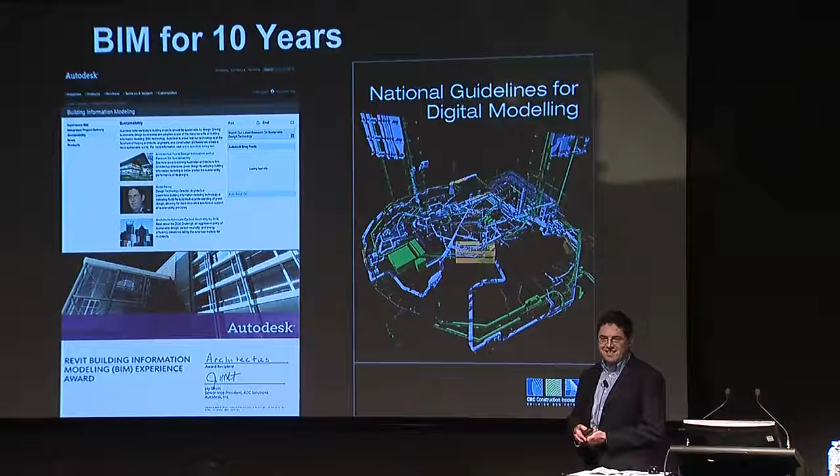So I'd just like to first introduce Architectus. We have 4 design studios in Australia and New Zealand and a representative office in Shanghai. We represent about 200 plus design professionals across those offices. And we've been using BIM for 10 years. I might say that, thanks for the insight, Andrew, but I think that if I had lost $200,000 on our implementation project in BIM, I wouldn't be here speaking to you today.

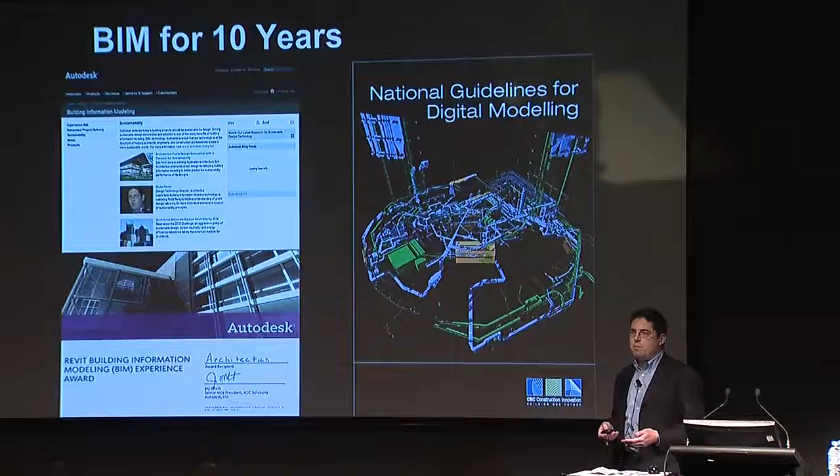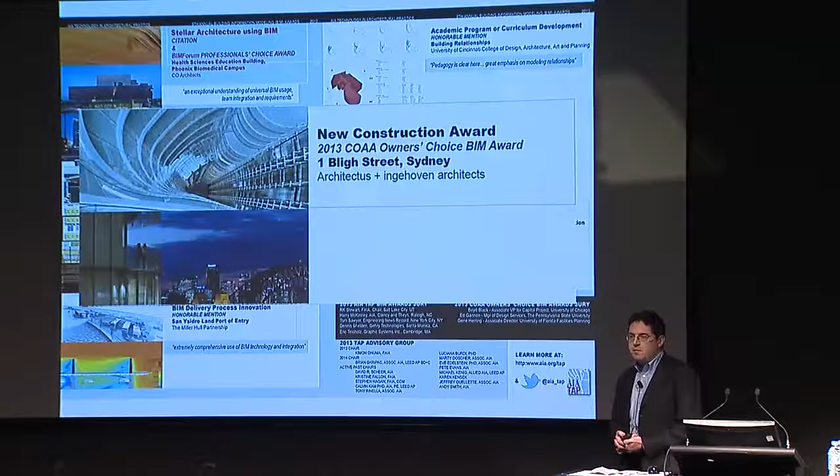Anyway, we've had considerable success with BIM, and that's been in an environment where, as time has gone by, we've been more and more able to work with other people and really develop a collaborative environment for BIM. Recently, we were very pleased to receive the American Institute of Architects Technology in Architectural Practice Award in the Owner's Choice BIM Award category for One Bligh. So I think the Opera House has previously won an American Institute of Architects TAP Award from Australia, so it's great for BIM in this country to get that kind of a profile.

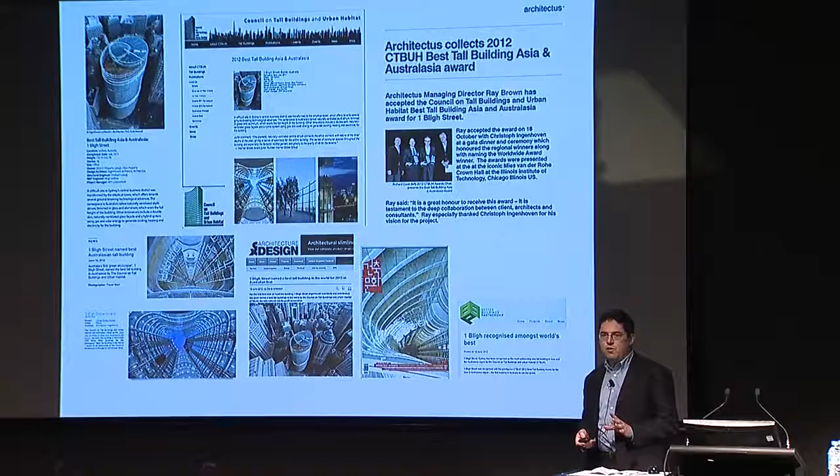And the building itself has been awarded in many international forums and in Australia. And I think that a lot of that is to do with some of the design quality that was able to be built into that design through very active engagement with our models and a lot of analysis and simulation. Now, for a large part of our BIM, we have actually been practicing lonely BIM, and I've commented before, its only virtue really is that it allows you to practice and get your own house in order and know really all of the detailed aspects of what you need to be doing to work with BIM.

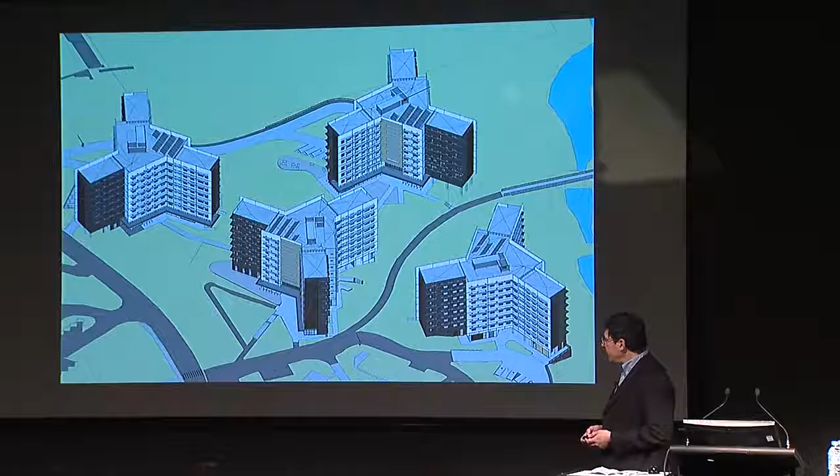What we really want to do is be working in the collaborative BIM environment. And this is an example. I'm working on this as an architect. It's my own project, 750 student beds with a major engineering company that has its own reputation for BIM, as do a lot of the individuals that work for that company. It's no one that's here today, but in fact, even though we're all working in BIM, we're working in the same Revit platform, we have not actually seen their model for more than a year.

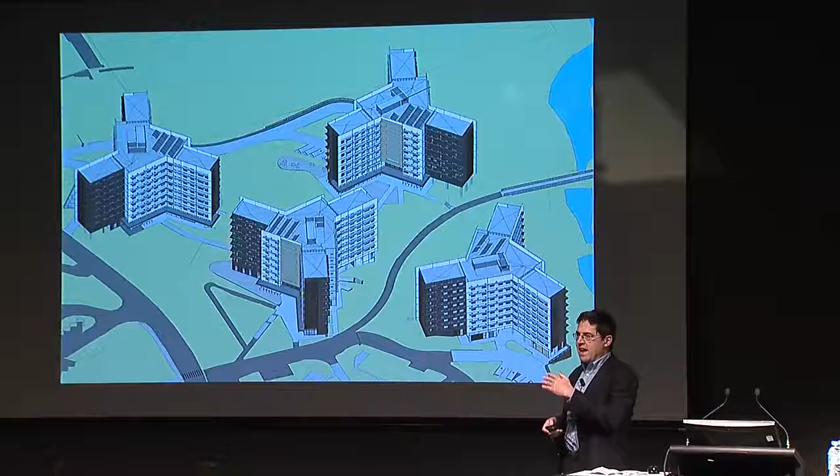And to me, it's a great shame, it's a great lost opportunity, but there is no BIM environment created around this practice. It's maybe an earlier stage even to the ones talked about yesterday, BIM enabled, BIM potential, but not taken up at all. So I'll just take a step back and think, well, why are we collaborating? What is it that owners really want from BIM? And clearly time and cost savings.

And I think, as Andrew alluded to, as BIM becomes more mainstream, as it extends further and further into construction, as it starts to optimise designs, and as people start to have confidence in that, then that will also start to bring about a reduction in subcontractor pricing, which will flow into head contractor prices, which will position certain parties at a competitive advantage, and that will be the tipping point where BIM becomes mainstream. There's a lot of hard heads in the world, and this money angle, especially if it's US dollars like that, that's what really persuades them.

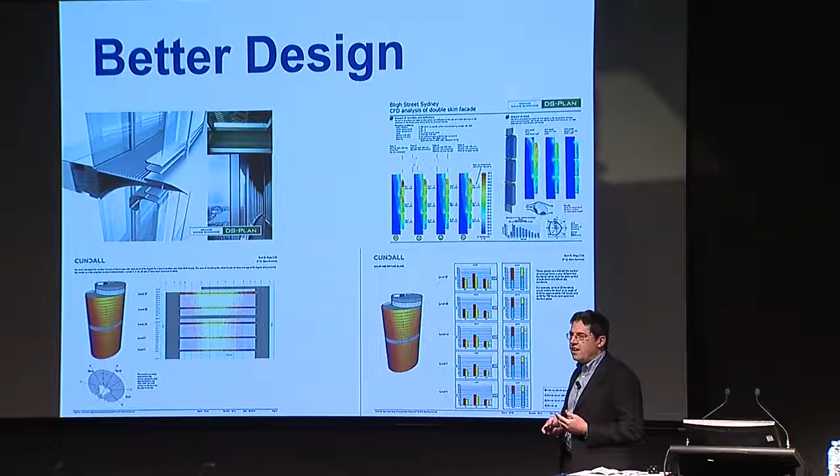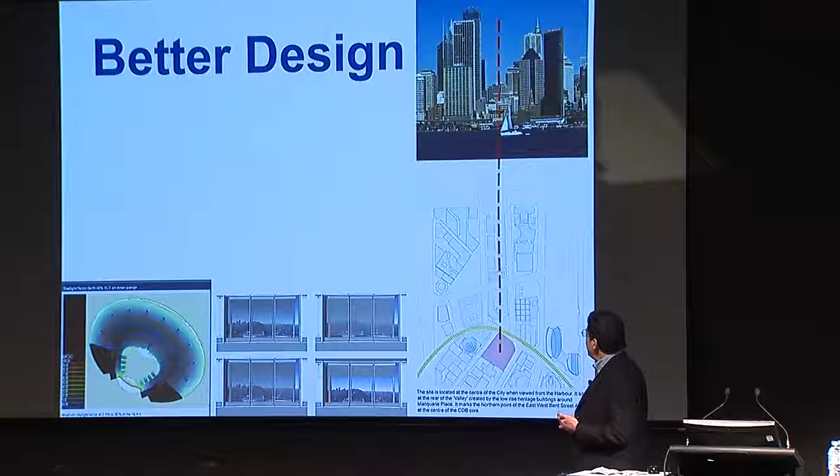But also better design, sorry, Chris, for the One Bligh, but this design was very much proved and tested using BIM processes, collaborative BIM processes. We had Cundall doing glare analysis and heat loads. We have a lot of computational fluid dynamics. We have a detailed examination of the double skin facade. We did view occlusion studies. We did lift studies. We did all sorts of things.

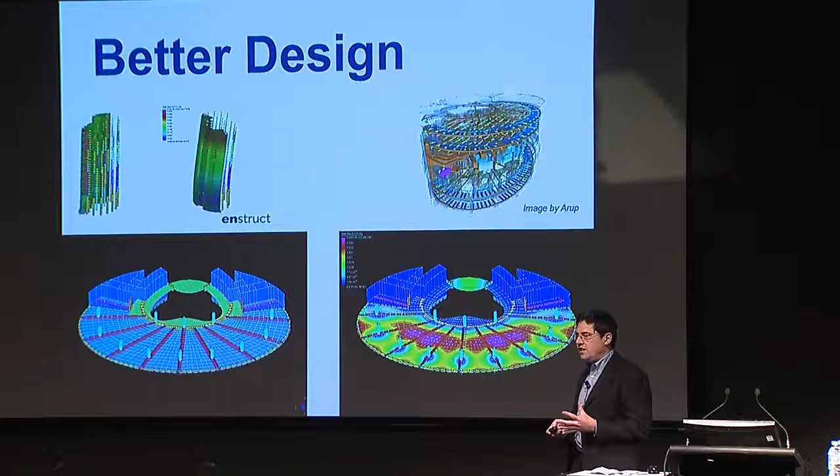Enstruct did finite element and slab deflection studies. Arup did very detailed consideration of the models at a slightly later stage, but that is your construction stage model. All of these things are unavailable for analysis and simulation in the 2D non-BIM world. The other thing owners want is lower risks. They want to not discover that the project is way over budget, too late to change it. They want to know that the design can actually be built.

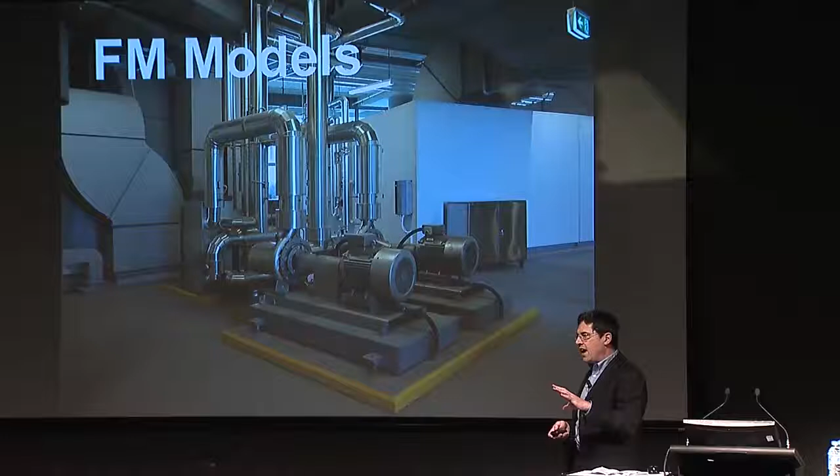And finally, I think FM models and the BIM MEPAUS initiative is very much based around the idea of transporting data from the early design stage of the project through so it's still there in the facilities model.

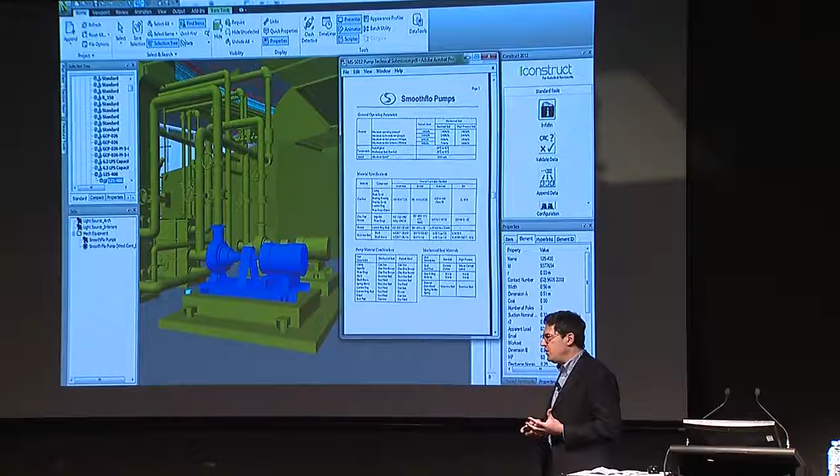We've been able to take the One Bligh handover model and prepare that as a platform for a facilities model for Dexus. And I think in terms of persuading an owner client like Dexus to mandate BIM on a project, it's essential that they think they're getting something for this, and at this stage they're not actually getting cost reductions. So for them to have a facilities model that they may at any time in the future, when that becomes more mainstream, be able to take up and use, is a very important selling point for the entire concept of BIM. So BIM is really an enabler.

In the 2D world, we don't have the quality of data and the timeliness of data to enable us to collaborate in any meaningful kind of a way. So BIM becomes a single point of truth. If we have proper model progression and we understand where the model is meant to be at any particular time, and we have a proper definition of level of development so that we know whether objects are specified or at that stage unspecified but really just placeholders, then we can interrogate other people's models to find out where their design is up to at any given stage.

Now that's a level of data mining that's not possible at all in the 2D world. All we do is get finalised 2D documentation that we don't really understand, isn't necessarily coordinated, and doesn't have any data or intelligence attached to the elements displayed, so we can't really find out what they are except by asking, and that as an object-by-object activity is far too onerous a task for anybody to do.

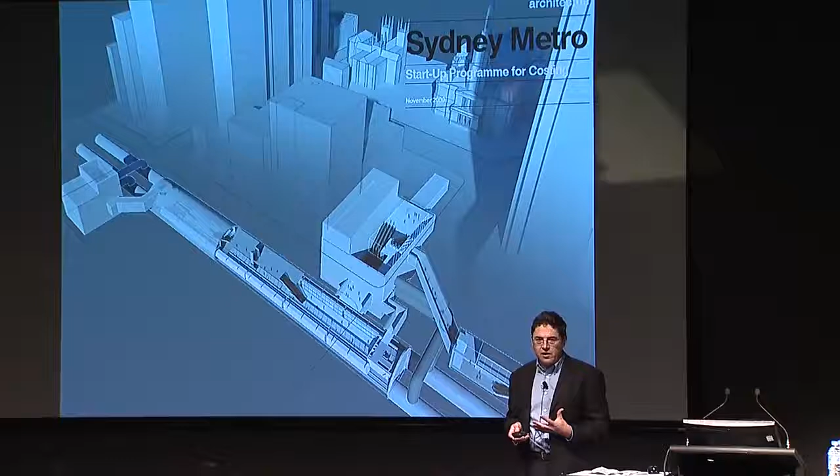So the problems with 2D were illustrated by this. We modelled the reference design for Town Hall Station in the Sydney Metro on behalf of Laing O'Rourke so that they could use that as a basis to estimate the quantities. And some things we found in that reference design was that, first of all, it wasn't resolved. Most of the fire stairs just never hit the ground, so too bad if there was a fire in there. And also that the 2D plans and sections didn't represent the geometry. There was no way of actually understanding the material quantities inside this with its complex forms without having modelled it. So it was a very informative exercise to have done that.

So I propose that BIM really needs to be put at the centre of what we're doing as the main channel for communication between the parties, and by all means have a face-to-face meeting around that, but forget about 2D document issues and waiting for another batch of drawings that'll take you a week to flip through before you even really understand them. Make this the centre.

So at One Bligh, it was a very simple topology to the way that was put together. We basically had 3 models coming together, and when they all link together, you can just think of that as the BIM. And from that, that data gets exported, sometimes one way, sometimes two way, to various other kinds of analysis packages, various things like Ecotect or Strand7 or whatever for particular analysis and simulation functionalities. So this gives us a real project understanding. We kind of understand where the other consultants are up to with their thinking.

And it allows innovation because I think often innovation is actually driven by having another person around the table to the usual bunch of people, someone who can just throw in that off-the-wall idea that actually is quite a good idea. And I think this is one of the key advantages if we can start to move to a situation where we have early subcontractor involvement in our projects, early contractor involvement. If we can get those ideas in early, that is going to change the way that we actually design things. And making BIM the centre, getting everybody together, just spinning the model and having a look and seeing where it's developed to at a certain time.

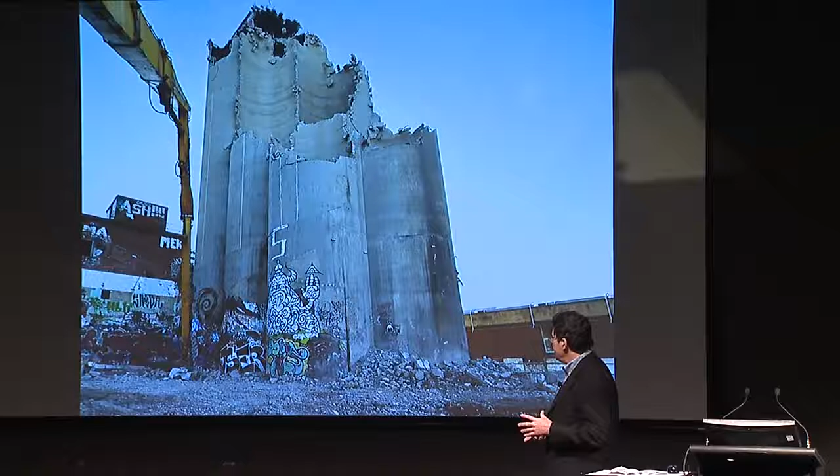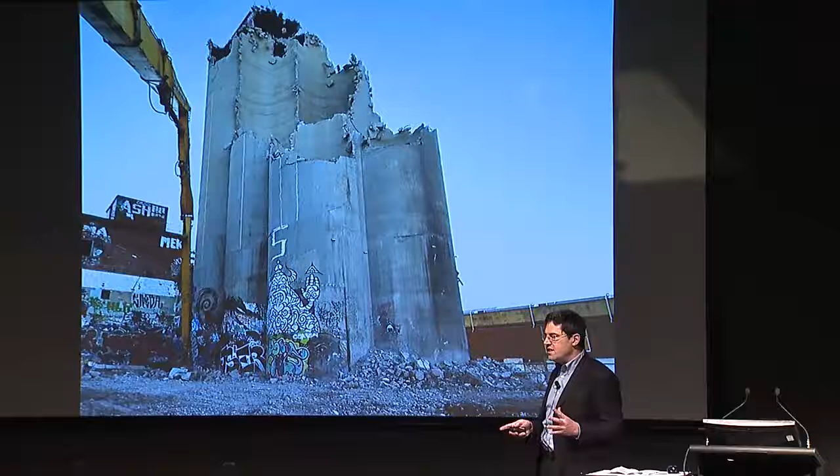We really need to be breaking down these silos and find a way whereby a project team that has members from across a number of different organisations can actually get together in a truly collaborative way. And I believe that that needs a framework. I don't think that just by the client saying, we'd like you guys to all use BIM, and to me that implies you're all going to collaborate, I don't think that that does anything much at all.

I think what we really need is to have a very detailed strategy around how we're going to collaborate on the project. And a few people have made the point. This isn't about technology so much. The technology is complex, there's no doubt about it. I am very hands-on, Andrew, and if somebody comes to me with a Revit problem, sometimes the answer is not at all apparent. If you're hands-on with Revit, you'll know what I'm talking about. There need to be those technology guys that have the answers, but that's only part of the picture.

We really need to be very inclusive in the way that we involve all of the designers, all of the parts of a project team in using the BIM at the centre in order to collaborate, and that requires strategy. It requires cooperation and it requires trust, and I'll mention a bit later, but we don't actually have a hard contractual framework in which this is happening at the moment.

What we have at the moment is people going ahead and saying, this BIM, it's a great idea and we're going to do it because we're enthusiastic about doing it. We're going to throw a bit more effort into our projects because we think that's very beneficial to the project. We're going to find people that we like working with and we're going to try and work with them again and again on different projects. And that's what's happening at the moment. It's based on building trust and building cooperation.

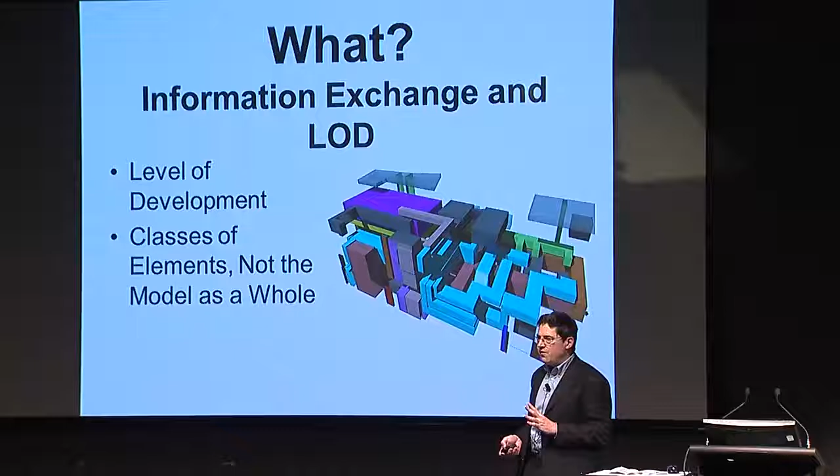And we certainly don't take Revit models and upgrade our families throughout in 5 distinct steps to represent 5 distinct stages of level of development, like it might be assumed you do from looking at a BIM execution plan in isolation. So that is something that needs to work through in the way that you would develop a framework. I mean, perhaps it's a case that objects in models need to be tagged with some basics as to whether they are still generic or whether they've been selected or not. Maybe that's just a switch on the object rather than anything else, and we use the same family all the way through, or whatever it might be.

Because if some of the information in the model is unreliable, then it all is. Like, you know, if somebody else is looking at your model, and they're trying to speed up the workflow, then if they can't rely on this bit, they're not going to rely on this bit over here. One of them might in fact be reliable, right? So we need to actually have a defined concept of how that's going to work.

There's also issues of asymmetry of information. I won't go through the whole thing, but you know, sometimes I need a bit of information that somebody else wasn't thinking of providing till well further down the track, right? So we need to actually flag those issues and find a resolution for it.

I saw a presentation from someone from HOK, whose name escapes me, but they were saying they had a project office. They were all co-located and they were working on a project together. It was an extremely collaborative environment, except that the HOK guys found that they were spending all their time answering questions about their own design and their own model coming from all the other parties rather than the other parties looking at the models themselves. And in the end, they said, you're only allowed to service other people's information requirements for a 1-hour period every morning and then get back to work, basically. So we need to make sure that actually everybody has the skills to go and interrogate, and that we have the integrity in the models so that we have reliable data that can be used.

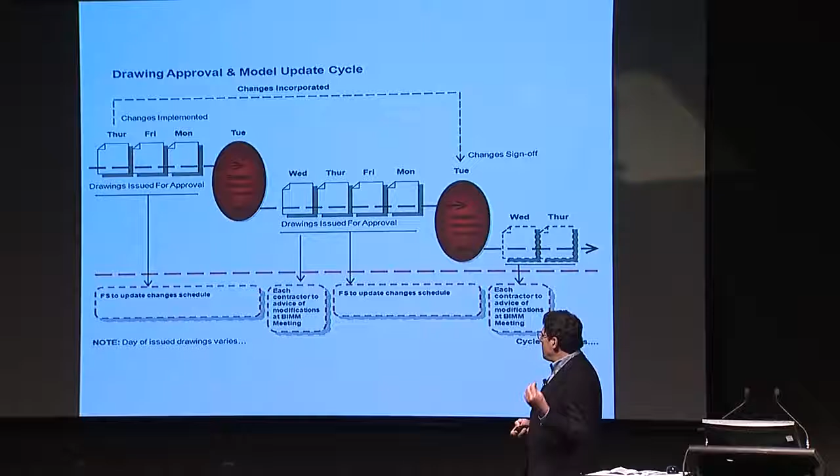So model progression, we need to know where we are with the design of our models, and what is selected, what isn't selected. I think part of that is having a publication cycle, we called it. Alex had a similar idea yesterday, so good to see people are generating the same kinds of ideas. But you can't have continuously changing models. Nobody can get a grip on that. We're always in a state of transforming our models and it's half done.

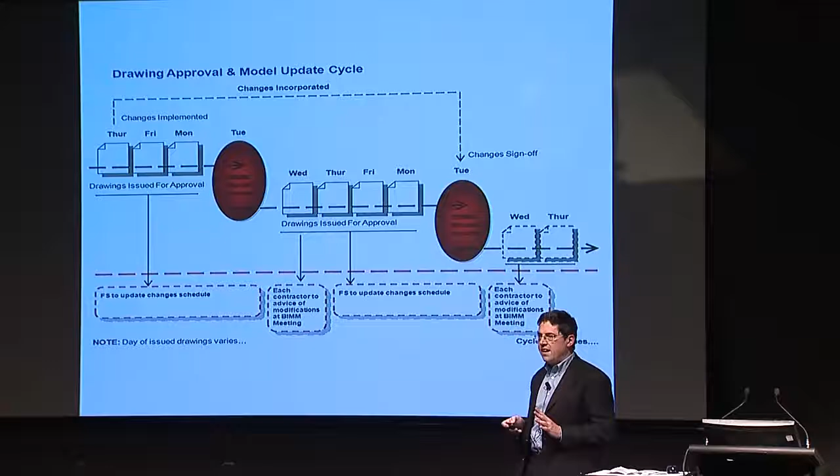We need to have some hold points where we just freeze that model and get it out, and that's what people look at. And that can go with clash reports or revision clouds or whatever is necessary to tell people which bits you can look at and rely on and which bits to ignore for now because they're still halfway through a change. But the idea of a model server with everybody checking stuff in and out and making changes all the time, I think is really like wrestling jelly in the current environment. It just takes time to get any change done to a model.

So we need to understand other parties' project workflows. That's what that LOD example was. We need to understand that at schematic design, or when we're ready to go into a development application, the architect is going to have columns in his drawing set that goes to council. But at that stage, the structural engineer could perfectly well just be working with the sketches and calculations and a fairly conceptual design of what they're doing. They may not have gone into hardline at that point. In fact, I think it's somewhat unlikely that they have. So we need to understand that that's the way the workflow works.

If it doesn't suit the architect for it to happen that way, well, that needs to be workshopped and a solution found to it. If we're going to rely on their objects in our models to complete the picture of any 2D output, well then we are letting somebody else have authority and responsibility over something that's absolutely essential for us.

So perhaps a better way to approach that is to say we're going to do a handover at a certain stage, or we're going to have managed but parallel objects, and we're going to have a system in place where we don't double count those objects. But there are a lot of those kind of issues in bringing multiple models together.

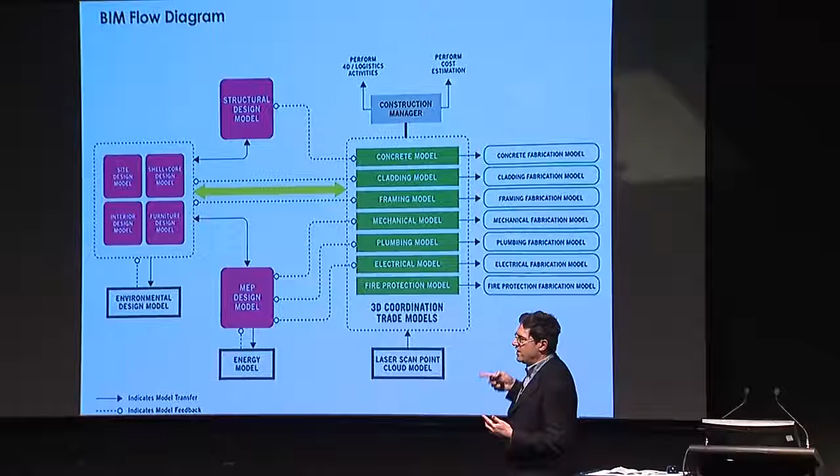Do the project leaders in the various offices actually understand this diagram, or anyone like it? Do they know what this is signing them up for, these links, and is this just representing a one-off thing, or how often is it, and who's doing it, and all of those kind of things.

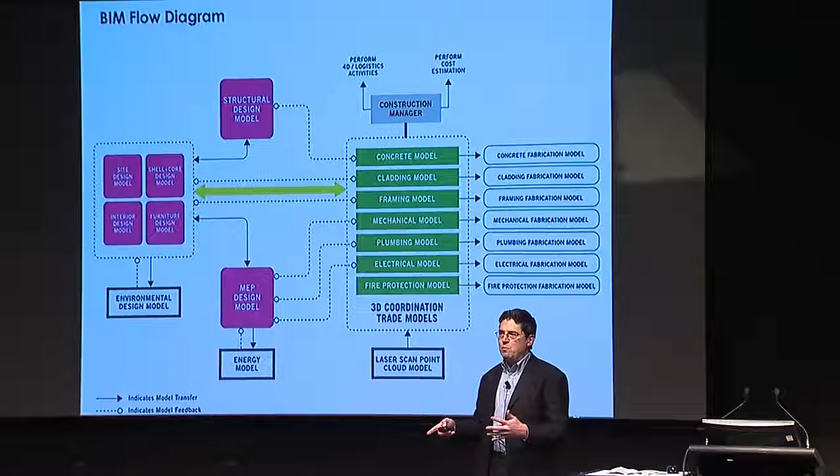I mean, there's a whole aspect to BIM that is very technical and should maybe be left to some technicians who know the answer to this kind of stuff and can just report to the project leader and say, look, it's not a problem, you can do it, you just do it this way.

File transfer mechanisms, we've seen it from Aconex today, we've seen Cloud 360, there's lots of ways of doing this at the moment. I don't think there's much point to it unless you have that publication cycle in place so that you know really rigorously when you're going to be delivering information, and also importantly who might be falling behind in their production of design information, because if they're falling behind in getting their stuff out, well, you're basically not collaborating with them. They haven't thought out their design sufficiently for you to make any intelligent kind of comments on it.

And co-location represents a great opportunity on the project sizes that warrant it, but impossible to do on anything small. Our organisation silo will override any benefit from co-location. Project scope, setting fees and expectations.

We used to do a certain amount of work, then we could do it with BIM authoring, and that was actually less work once you're good at it. And then we start to do all of these extra things because we can, and we're providing a lot better value, but if those are add-on services, we've got to find a way of capturing that and getting paid for doing that, at least getting credit for it, at least getting the same team back together, the same successful team.

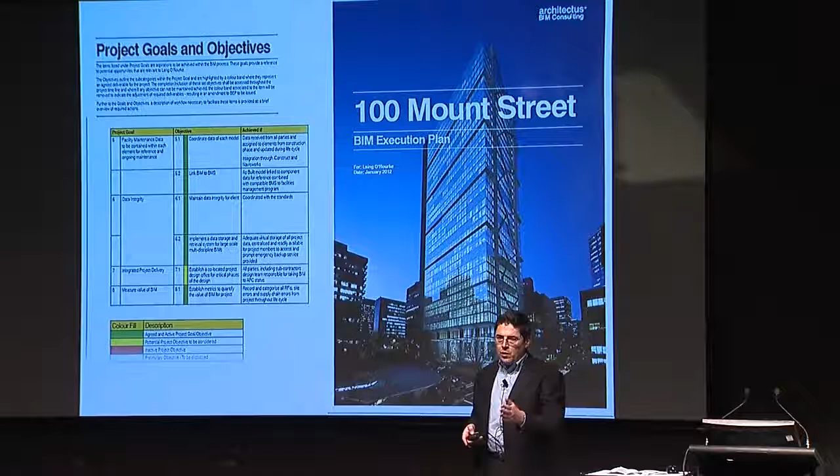Every time I see the shop drawings come in or whatever, all the equipment's been changed, whatever intake was on the left is now on the right, etc. The whole thing is completely modified. So it seems to me there's no point really in taking the consultant's design beyond the point of a tested reference design that works, is workable with performance criteria. The rest is to the subcontractor, who's much, much closer to the market, knows what equipment is available and what price it's coming in at, which is important.